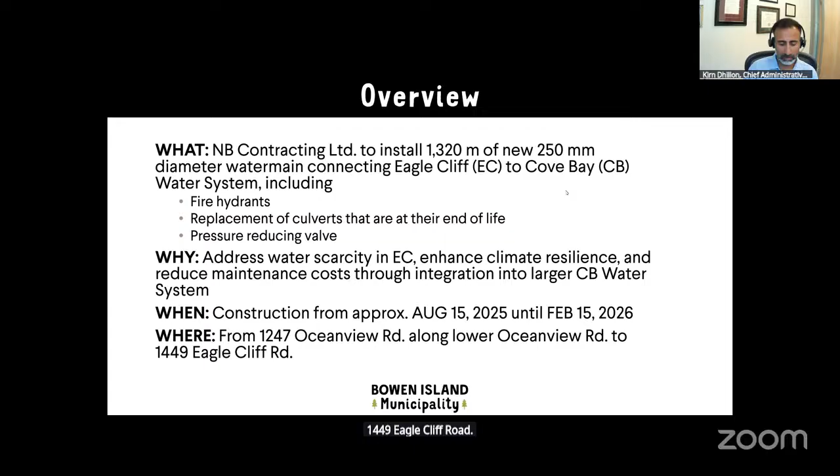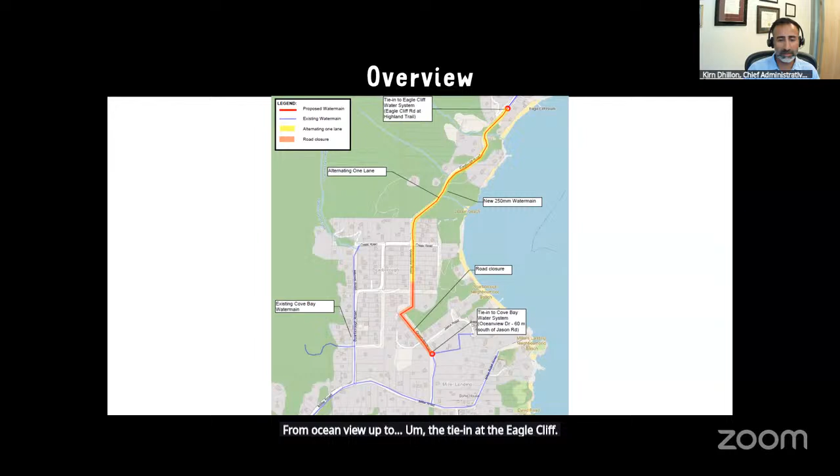Construction would start around August 15th and be concluded by mid-February, we estimate. It runs from 1247 Oceanview Road along Lower Oceanview Road to 1449 Eagle Cliff Road. Here's a map showing the alignment where the works are going to be happening, from Oceanview up to the tie-in at Eagle Cliff. This information will be provided afterwards on our website.

So currently the Eagle Cliff water system is supplied by a 10,000 cubic meter open reservoir. As noted previously, there are issues with the dam. And there are also 2 low yield wells with arsenic filters.

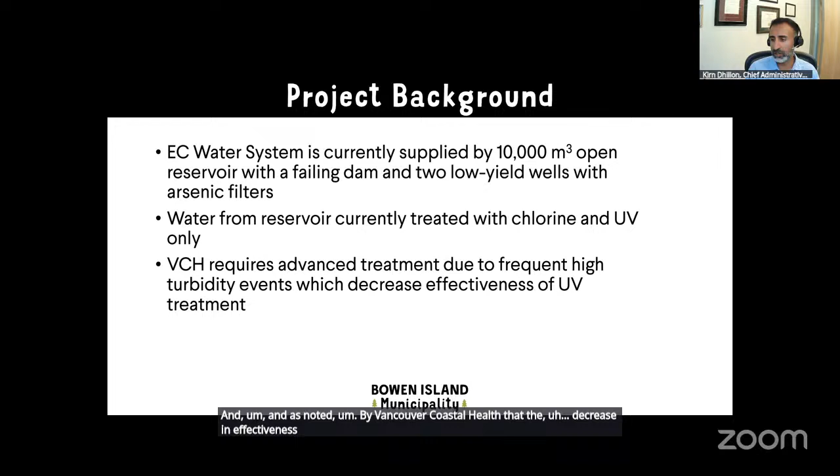And the water from these are treated with chlorine and UV. So there's no treatment for turbidity or other constituents. And Vancouver Coastal Health has required advanced treatment due to the noted high turbidity at certain times of year, and as noted by Vancouver Coastal Health, the decrease in effectiveness of UV treatment with the higher turbidity.

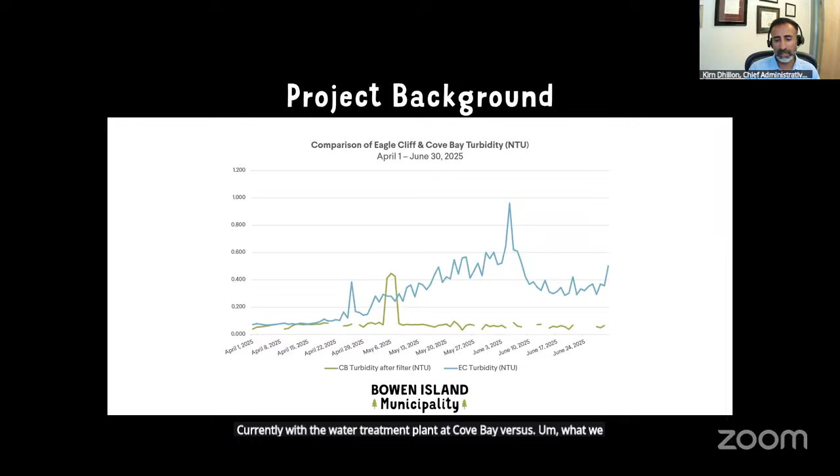And so here's just a useful graphic to show the difference in turbidity with what we're seeing currently with the water treatment plant at Cove Bay versus what we see in Eagle Cliff. And there's quite a difference between the turbidity of the two. The lower the number, the better. And so we're striving to meet 0.1 NTU, which is the unit of measure.

And even with only the one filtration module up and running, we're still achieving quite favorable results for turbidity. Anecdotally, I've heard from folks in the Cove Bay system that their private water systems, where they have their own filtration systems, they've had to change out their own private filters quite a bit less, which confirms these numbers anecdotally.

With that, I will turn it over to Glenn with Urban Systems to discuss where we are at with the project and how we're proceeding forward. Glenn? Yeah, thanks, Kirn. Hi, everybody. So I've been involved in the project from its original conception, helping identify options to better service Eagle Cliff, and have been involved through the design process and now getting into construction.

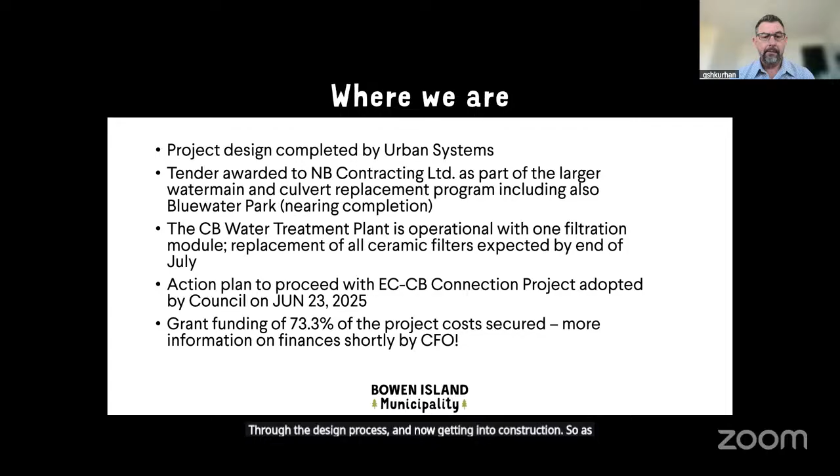So as Kirn already indicated, NB Contracting, who is already engaged with the municipality and about to complete some water improvements on the west side, will be engaged to complete this particular tie-in. I think it's public knowledge by some folks, and some questions have already been asked about the Cove Bay water treatment plant, recognizing that it's not fully operational.

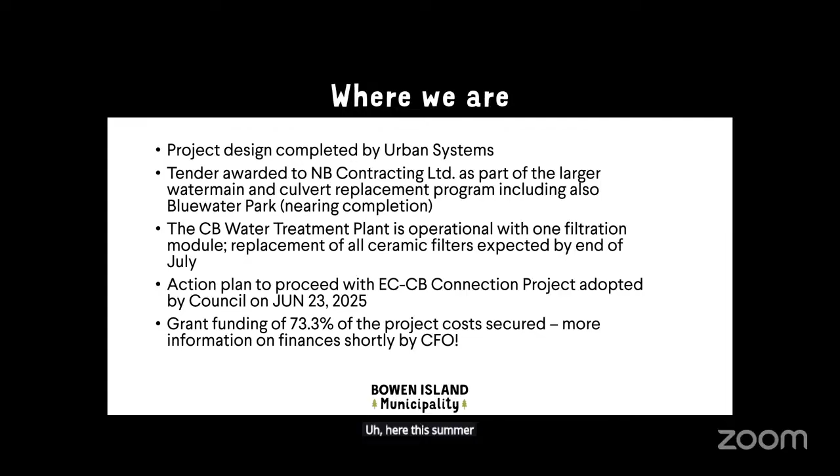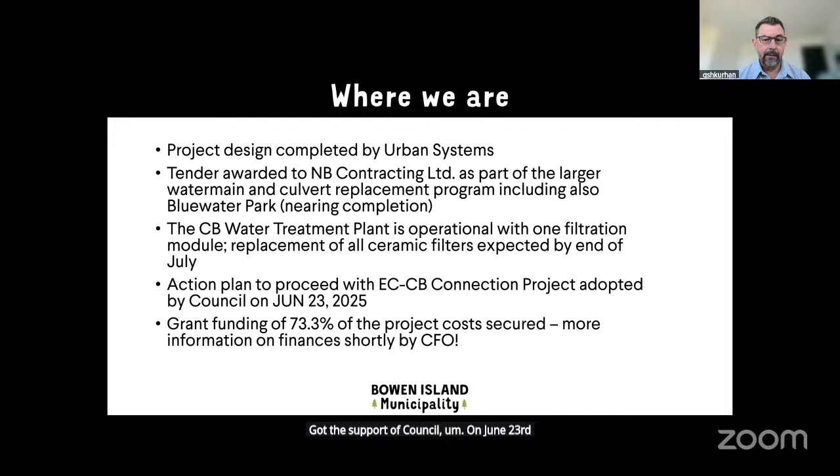But I think it's confirmed, Kirn. I think you received a confirmation email just recently this week that the new filters are en route from Ontario, and the plant is expected to be up at full capacity this summer. I'll talk about the timelines of the project a little bit more on the following slide. But with that, the municipality has got the support of council on June 23rd to advance with this particular water main connection project.

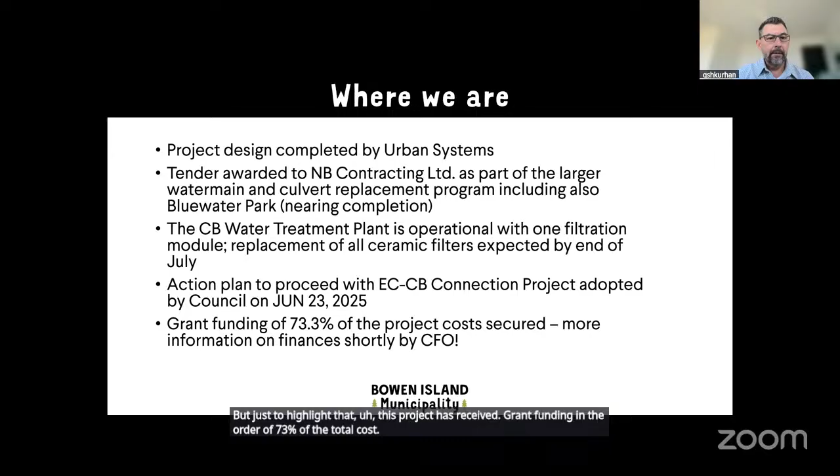I know that Kristen will be speaking to finance a little bit later on in the presentation, but just to highlight that this project has received grant funding in the order of 73% of the total cost. Sarah, or Kirn, could you advance? Yeah. So getting more into the capacity and service connections, the Cove Bay treatment plant is expected to be up at full capacity this summer.

The construction of the connection itself will take time. Again, February, March is the anticipated completion time. So the extra draw of water demand from Eagle Cliff won't occur until project completion. So there's no question that the plant will be at full capacity by the time Eagle Cliff connects, and calculations clearly demonstrate that there's more than adequate capacity in the treatment plant to service both communities.

In terms of connections, at this stage, the priority is to simply connect Eagle Cliff with Cove Bay. There's no intent, at this stage, to do any further improvements to the Eagle Cliff system, nor new service connections.

The community of Scarborough happens to be kind of in the middle of this extension project. And a couple of years ago, I believe was the general timeframe, the municipality sent out a questionnaire seeking input from those in Scarborough of their interest to connect to this system. At the time, anyway, there was relatively little uptake of that. The municipality didn't receive a wide range of support to connect.

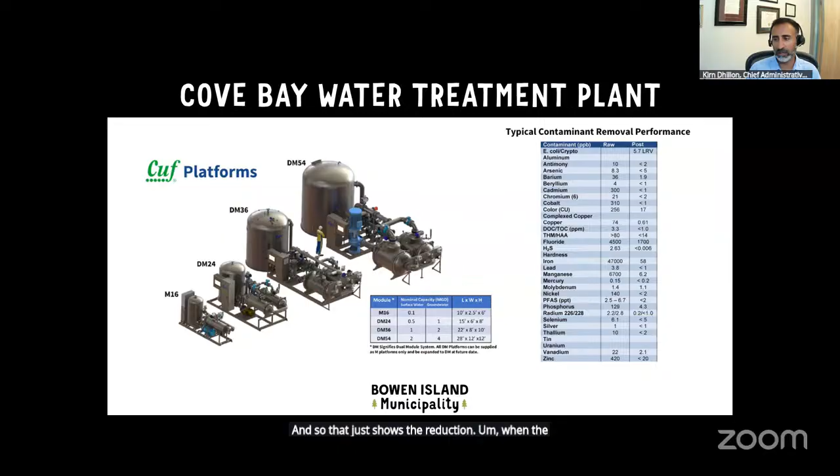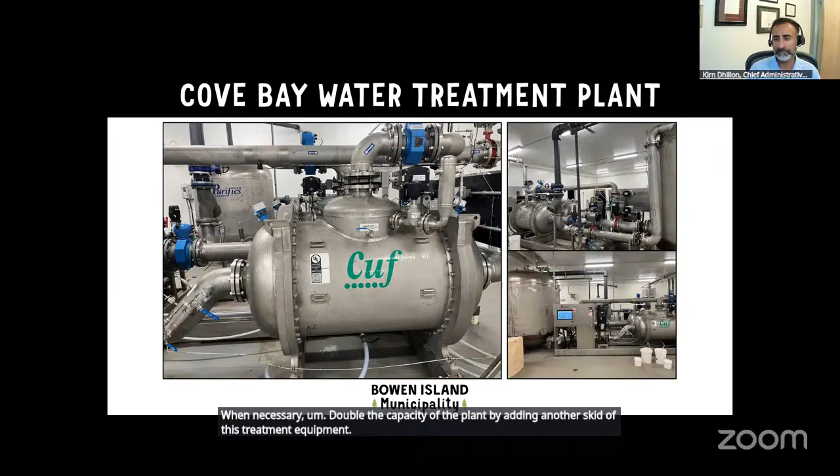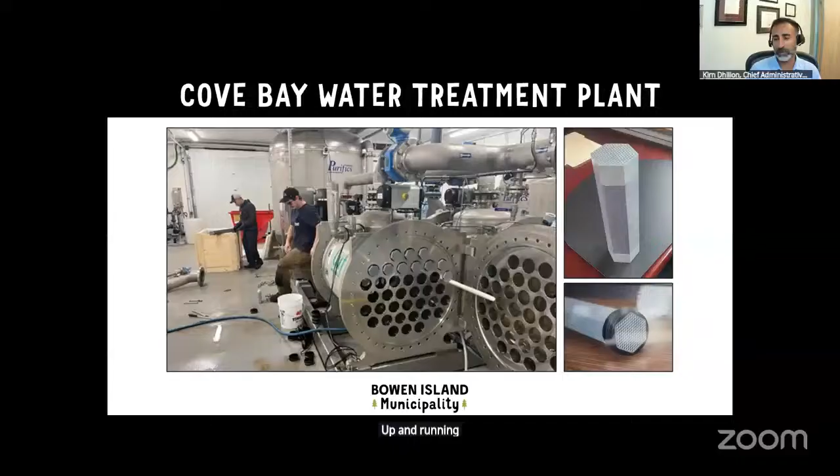being down, and it's correct that we have received a shipment of replacements from the supplier that are en route and will be installed next week. And with the addition of that, the hope is that we will be up and running 100% with those two modules. And so with that, I'll hand it back over to Glenn for more details on the project.

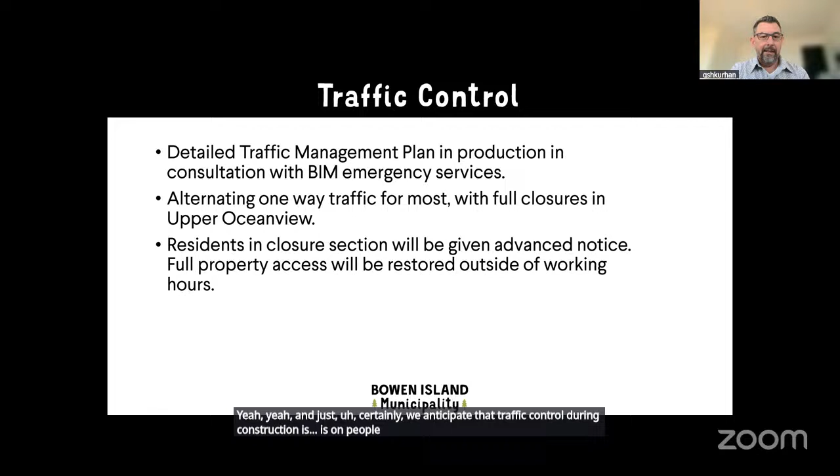Yeah, and certainly we anticipate that traffic control during construction is on people's minds. There is a detailed traffic management plan in production with the contractor NB in consultation with Bowen Island staff and emergency services. So the real details are still to be sorted out. But in essence, the majority of the project will be having alternating one-way traffic with some temporary road closures in

the upper Ocean View. And maybe actually, could you just bump to the next slide and then we can come back to this. So the red highlighted section. So the project begins on Upper Ocean View, just in the vicinity of Jason Road, and then continues down through an unopened roadway where the pathway is, and then goes down into Lower Ocean View. So that portion itself is quite narrow and will require full road closures.

Perhaps I'll elaborate on that in a second, but now that we've presented the graphic, maybe bump back to the previous slide for a second. Yeah, so the final bullet we've got there is residents in those closed sections will be given advance notice about being able to relocate a vehicle, and the closure would only occur during the construction working hours, but full property access would be restored at the end of a working day.

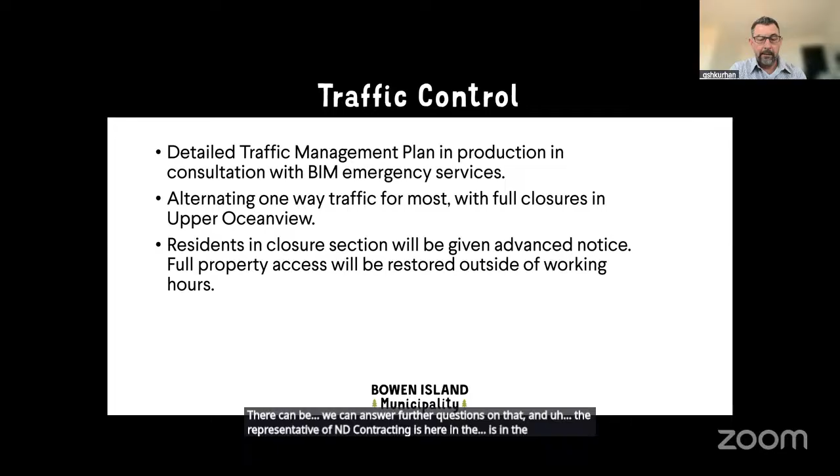We can answer further questions on that, and the representative of NB Contracting is here in the presentation as well to help answer questions later on. Okay, next slide, please. Or next slide again. That's it. Okay. So that concludes this section of the presentation. I guess NB is here to answer any questions in the Q&A session, unless there's anything specific that they would like to add at this point.

I'm not hearing anything, so I will stop sharing screen, and the next presenter, I believe, is our CFO. So I'll hand it over to Kristen, our CFO, to present her presentation. I do see a hand raised, but we really were going to wait until after the presentations were finished to have people start asking questions, just so it's fair for everybody. Yeah. Sorry, I thought we were starting the Q&A, so I jumped ahead. No problem. Okay, Kristen.

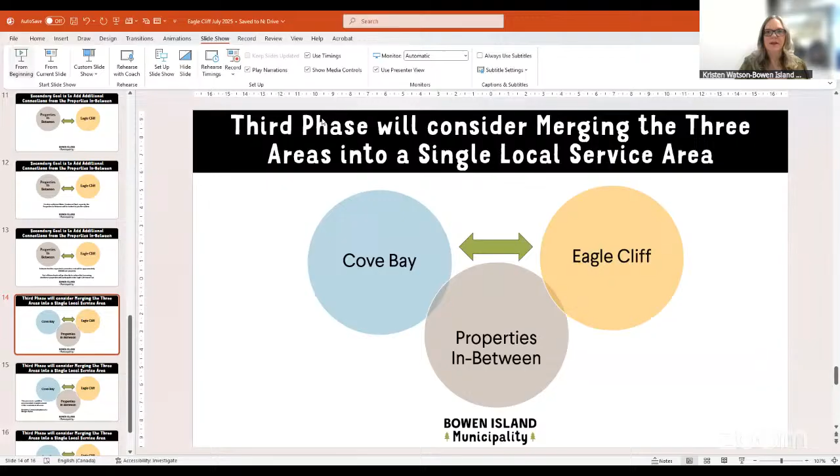Okay, thank you. I'll just go through this again. There. Okay, I trust that it's up and everybody can see it.

Okay, thanks. So starting with the basic finances of the project. The total contract as it's been awarded is just under $2 million. We have a 10% contingency included, and we have a budget for construction management at this point. So our total estimated expenditure to date is $2.26 million. Now, much of that is grant funded. The original grant was based on a 73.3% cost share.

To be clear, that grant was awarded in 2023. There have been some inflationary cost escalations on the project since that time, and the grant is fixed. So had we awarded a contract back 2 years ago when we'd gotten the grant, we could have expected that. I do anticipate a little bit of erosion of our purchasing power on our grant going forward.

So I'll show you a pie chart just in the next slide that shows really the cost breakdown as of now, as of this contract, as it's been awarded. So portions of this project are going to be split among being funded by the Eagle Cliff Local Service Area and Bowen Island Municipality in general.

So general requirements are kind of like site mobilization and traffic control, those sorts of things. We have that as an 80-20 split on the non-grant funded portion of the overall project. The earthworks, so that's all the digging required to involve laying the water mains, that's going to be funded. The non-grant funded portion will be borne 100% by the Eagle Cliff residents.

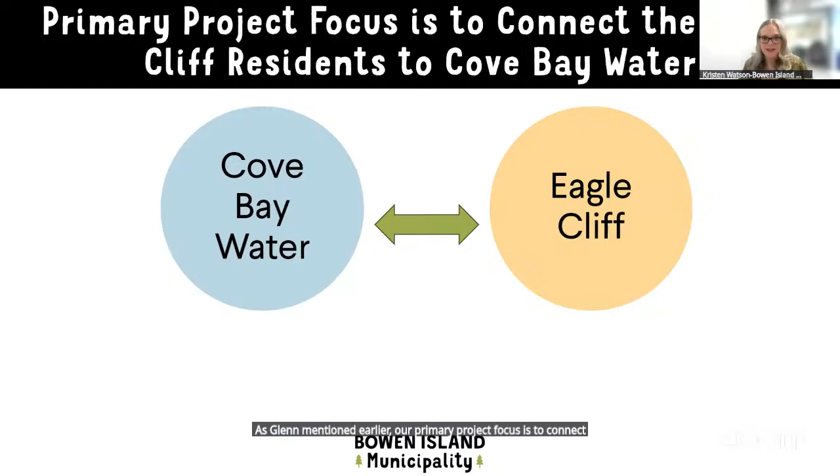As Glenn mentioned earlier, our primary project focus is to connect the Eagle Cliff residents to the Cove Bay water. We want to get that project completed. Once that's done, it's going to require an assessment of the treated water production capacity at the plant. What we'll need to do is to compare the actual treated water output to the rated capacity of the plant.

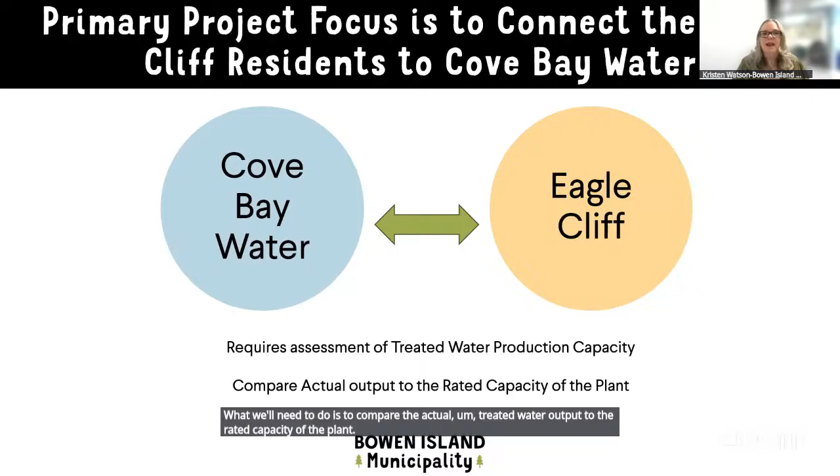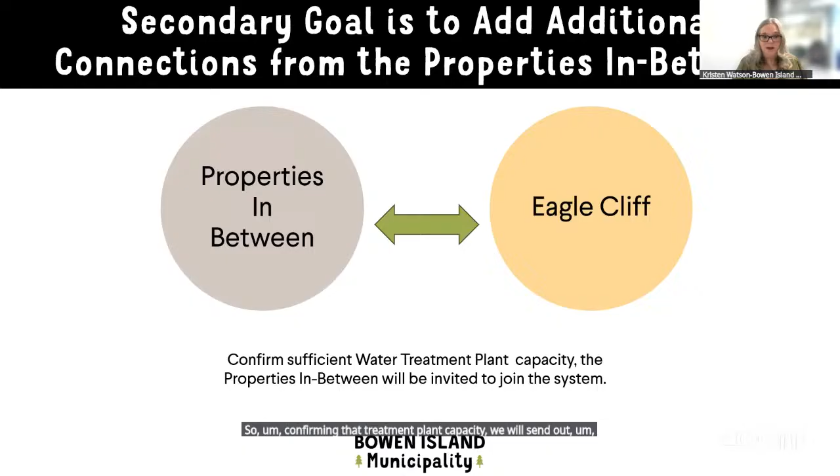And ensuring that that goes well, which we expect that it will, that's when we'll move into our secondary goal, which is to consider adding the additional connections from the properties in between. So that would be those Scarborough properties in between Cove Bay and Eagle Cliff. So confirming that treatment plant capacity, we will send out notices, and we will be inviting those properties in between to join the system.

We estimate at this point that the expected connection cost will be somewhere in the neighborhood of approximately $16,000 per property. And part of these funds will go directly to reducing the borrowing that the residents of Eagle Cliff have undertaken to fund the connection. And these properties will then be participating in the Eagle Cliff parcel tax.

The third phase then, which we are looking to consider doing, would be merging both of the local service areas into a single local service area. This is a very significant undertaking. It does require a petition process in both the Eagle Cliff area and the Cove Bay area, and it requires the assent of residents in all of those areas. And then it requires that council would adopt a merger bylaw to create a single service area.

It's an administrative process. We need to undertake a financial calculation that's required to look at the net financial assets of all of the assets in both local service areas, because our aim would be to achieve a sense of equity equilibrium prior to the merger. So we can't have one local service area with really old and outdated infrastructure and no money in reserve merging with another local service area that has all brand new infrastructure and lots of money in reserve.